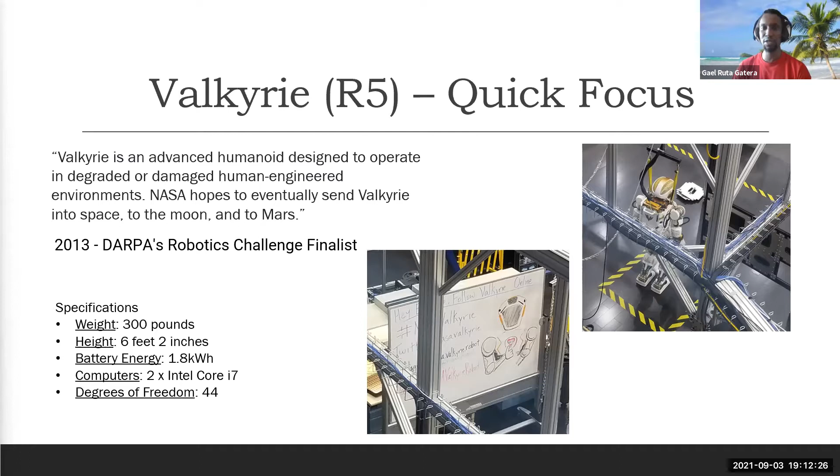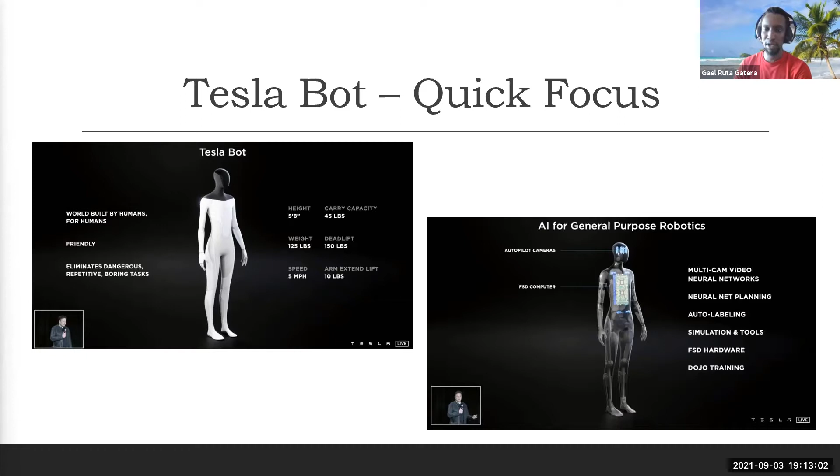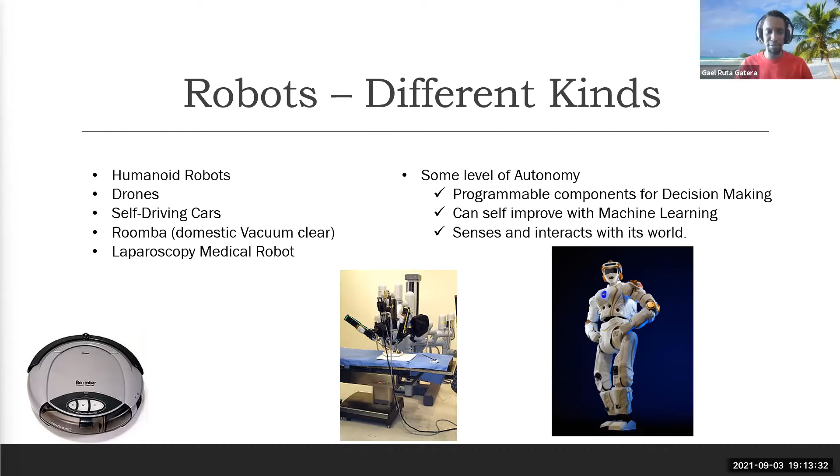One thing I forgot to mention was also this Roomba. It's a small robot that was made to essentially be a vacuum cleaner. It is a robot because it essentially sends a bunch of lasers around it in order to sense and know how far the walls are, and essentially maneuver around your room or even stairs or stuff like that. So it's a robot in that sense.

And so what we'll be focused on for the next few months is aerial robots. You guys have seen drones around - maybe you go to Best Buy, you go to Walmart, you see a bunch of drones. However, some of these drones are robots and some of them are not. Intuitively, the really, really expensive ones are categorized as robots, and the really cheap ones are not robots.

So how can you tell that? The cheaper drones are what we categorize as controlled by RC, or radio control. These kinds of drones, although they may have a camera, they're not able to think, as we mentioned earlier. They don't necessarily have autonomous components, nor can they be programmed with Python.

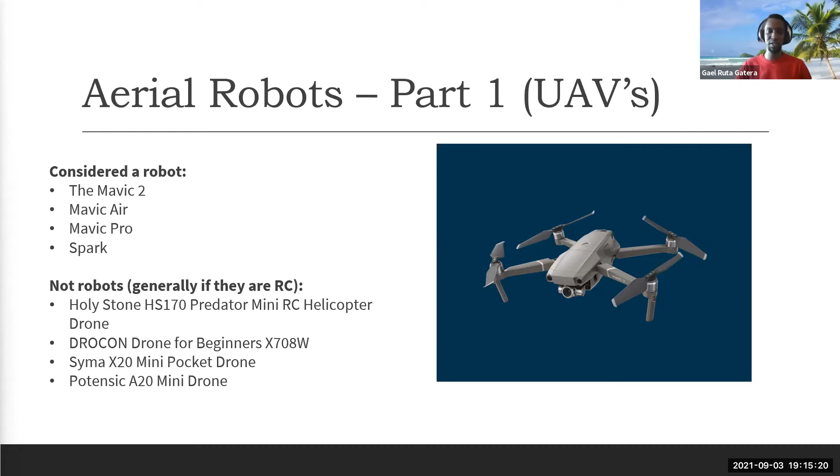However, ones such as the Mavic 2 or Mavic Air are used for inspecting houses and terrains. If the pilot sends the wrong command and the drone is really close to a wall and might crash into it, the drone is able to just stop, because it's able to perceive — the term for it is obstacle avoidance, or object avoidance. So it has those components.

A very famous robot that was sent to another planet is called the Ingenuity, the Mars Ingenuity helicopter. This one was essentially a demo flight to demonstrate that we can fly helicopters on another planet — that we can fly robots on planets other than just Earth.

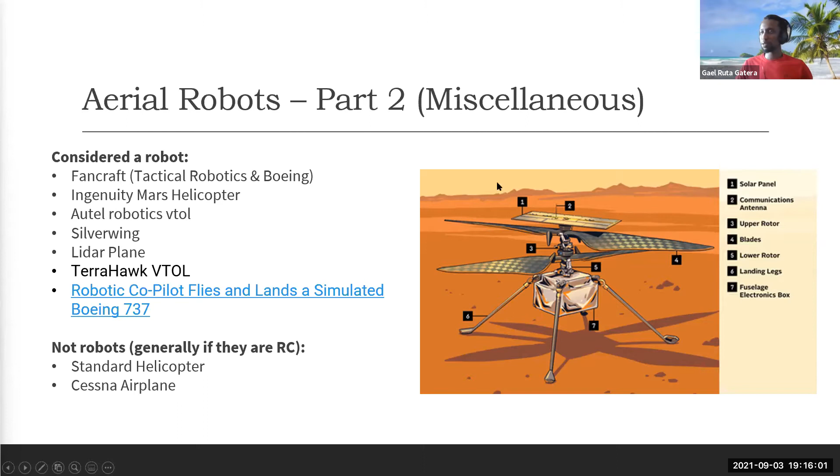There are many examples other than the Ingenuity Mars helicopter. Here's another picture of it. It weighs a mere 4 pounds, so it's really light but extremely powerful. I don't even think most computers weigh under 4 pounds now — this is quite a feat.

This is something that is programmed using very similar methodologies to what you'll be learning here.

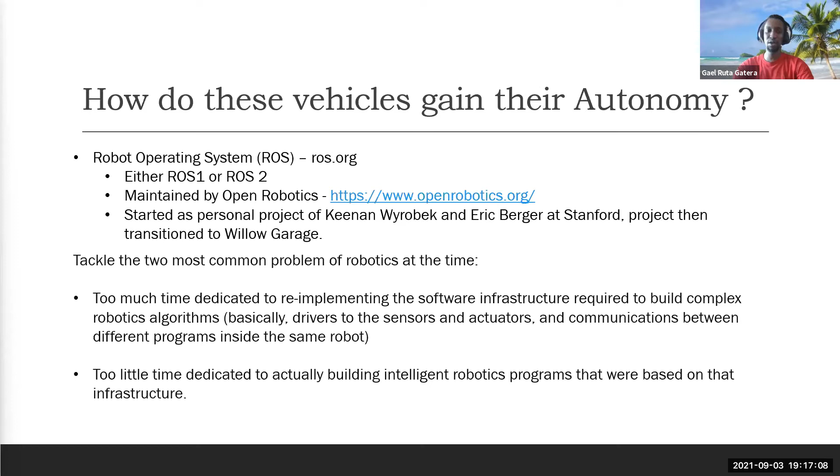Typically, these aerial vehicles and robots gain their autonomy through ROS. We will most likely not be touching ROS, which stands for Robot Operating System, but I wanted to mention it so you're all aware of it. Most of these aerial vehicles, or even humanoid bots, gain their autonomy through this meta operating system called the Robot Operating System.

I wanted to highlight one particular aerial robot that I like, called the Zipline Drone, or Zips for short. These drones are used to deliver medical supplies, and they're actually operational in Rwanda and in Ghana. This shows how important robotics and aerial robots will be to the future of the world. Why do they operate in Rwanda and Ghana? Because of regulatory problems with the FAA — it's easier to start such a project in countries where regulations aren't as strict.

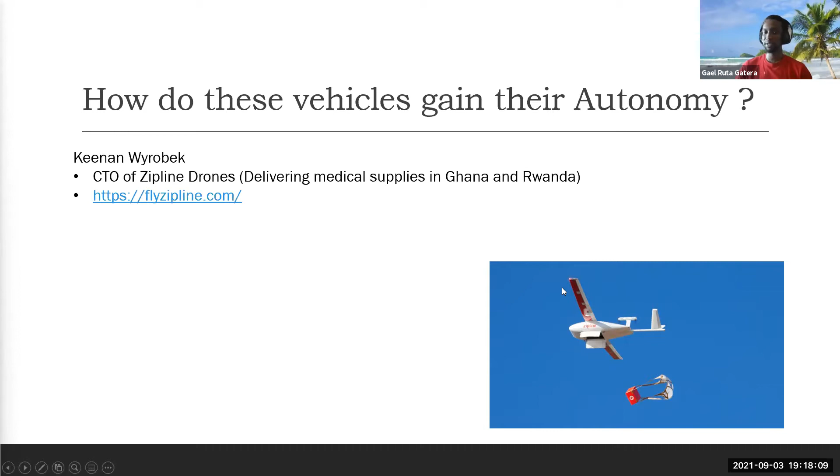I'm going to show you guys a quick Python exercise that involves these Zipline drones. Typically I'm not going to go through this in depth, but let me go through it real quick so you're aware, because we might touch on these subjects when we get closer to ARC.

Aerial robots have several tasks: modeling, state estimation and perception, flight controls, and motion planning. The modeling part is really just the flight dynamics — a bunch of equations or rules that tell the robot what it's meant to do. State estimation and perception is essentially how robots learn to interact with the world around them. Flight controls, in short, are just flight control laws. And motion planning is basically telling the drone what path it's going to take.

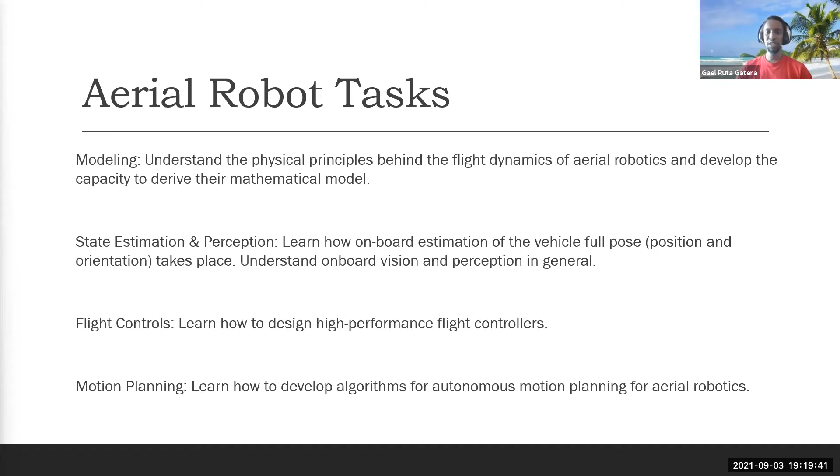Some of these tasks can also apply to other robots, but especially with state estimation and modeling, some of the laws are different. Self-driving cars can also be categorized as robots, because again, they don't use that much human interaction. This is kind of a diagram of what I just showed you guys.

So the last quick slide: the reason why we're all here is that in January, we're all as a team going to enter into what is called the Aerial Robotics Competition by AIAA.

The ARC is essentially a competition where you can be competing with other high school students to design an aerial robot that is tasked for a specific mission. The mission for this year will be search and rescue, and we will be competing with a Tello drone, which you'll be able to program fully in Python.

So you'll be learning quite a lot of really interesting things. I think it's interesting and really cool and really fun. You already have the drone, I think Dr. Adebowale already has the drone with him, so we'll have quite a lot of fun.

I have a drone of my own here. I have a co-drone, and I also have a DJI Tello drone, just because it's really cool for me to play around with these things. There's a lot of fun in learning such powerful things while having fun.

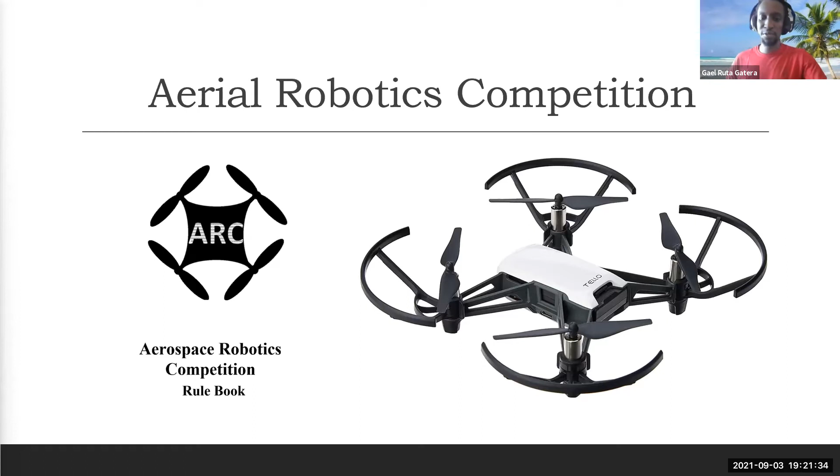So that's kind of what I had for right now. I want to take a pause for any questions before we go into the Python exercise that I had planned.

I have a question. Go ahead. What Python platform will we use? Excuse me? Say that again, what Python platform will we use?

So actually Python, you can use really any platform. I think the word you're looking for is IDE, or Integrated Development Environment. Maybe Jane can answer what she had planned, because I'm flexible with any.

Yeah, so me and the boys have been working with Spyder a little bit, but I don't know if you want to move to Colab or something like that, where we can have a more collaborative environment.

Okay, so I think we can have that conversation separately. But thank you for asking that question, Samuel, that's something we can definitely think about. As far as why we would use Colab, maybe for presentation, but for the actual implementation it will have to be an IDE.

I had PyCharm in mind, that's just because that's what I've used, but anything works for me. There's also PyCharm Edu, which I found recently, which is actually good for educators to send in assignments to students. I've played around with it, I can't remember exactly how it works, but it won't take me long to understand how PyCharm Edu works. I'm also open to Spyder.

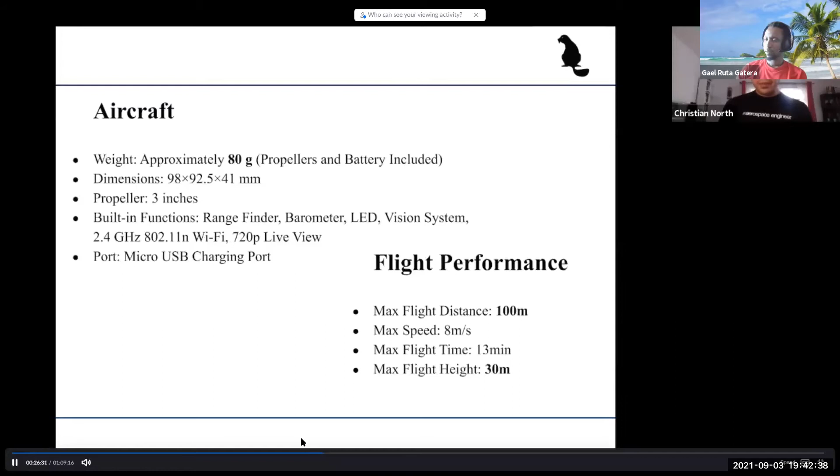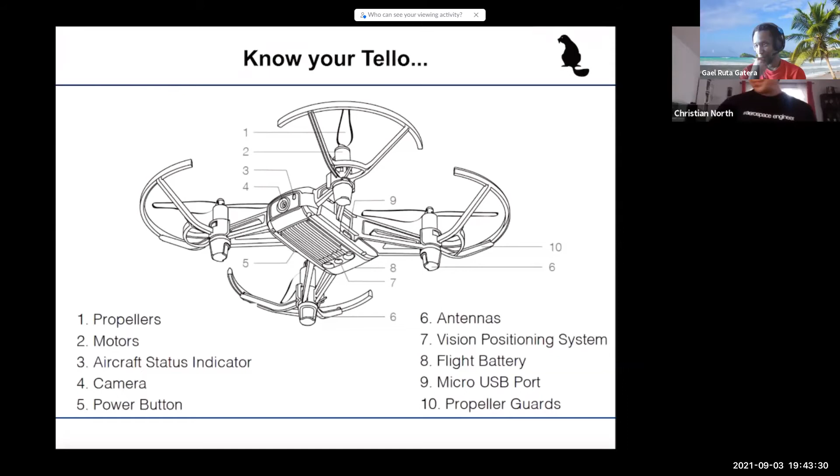So when you grab it like this, that's the way it looks like. Okay. All good? Any questions?

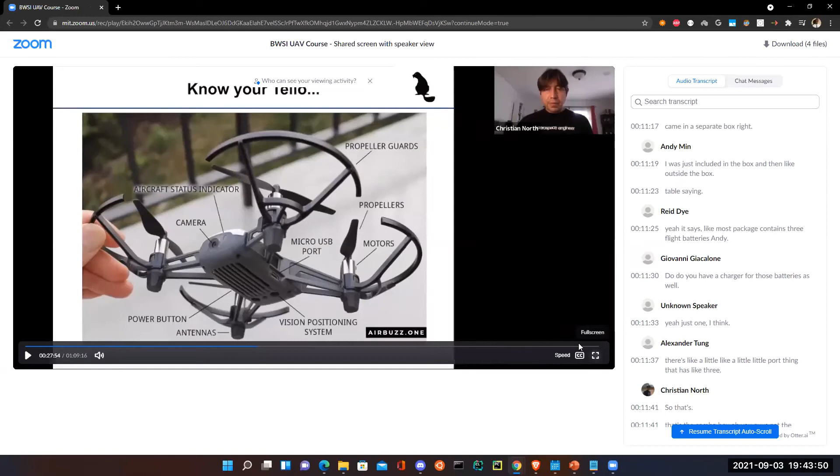I have a question. Go ahead. Why does it have a camera? Why does the Tello drone have a camera, you said? So earlier I mentioned about robotics, right? What makes a robot essentially different than a simple toy? That goes back to that same question. So can you first answer my question? And then - it's based on some of the discussions we had at the very beginning - what makes a robot different than not a robot? What makes a robot, right?

So I'm gonna answer that. It's called automation. The drone has certain autonomous features, and the end goal of a robot is to get it to try, at least to try, to almost make decisions on their own.

For example, you as a human being, why do you have eyes? It's in order to see. So if you're walking somewhere and you see an obstacle, you don't realize it because it's subconscious. Or you see a door, you say, okay, there's a door in front of me, I have to open it.

So why does the drone have a camera? In scientific terms, they call it being able to perceive the space around it. The camera is essentially a sensor in order to give information to the drone, telling it where it is essentially located. That's why, in short, it has a camera.

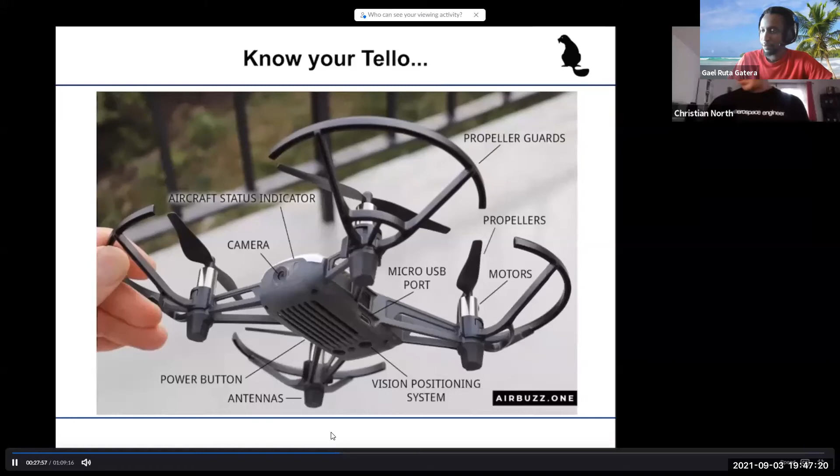Checklists are important, go through your checklist. The propellers are made of plastic, so they can break if it crashes. So if you can get safety goggles, I would get them, just because we don't want you guys to lose an eye or both of your eyes at such a young age if one of the propellers ends up flying off.

However, if you don't have goggles, make sure there's an adult with you that can ensure the propellers are fastened. As we get near to the competition and use our drone more, there might be wear and tear to our brushless motors, which might end up causing issues. So as we get closer to the competition, we might have to put in a budget to get you guys goggles, if not face shields too. A propeller can just fly into your face, which is not fun. You can get cut in your hands and everything.

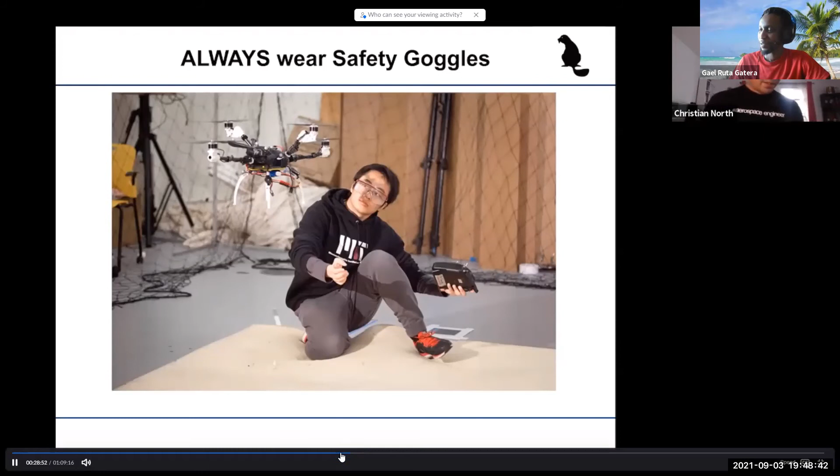Are the safety goggles glass or plastic? They're plastic.

Okay, I'm gonna fly through this really quickly. So remember, make sure that your remote control device, whether it be your computer or your phone, is fully charged. Make sure that the battery on the drone is mounted firmly.

Ensure that the propellers and propeller guards are in good condition. Also ensure that there's nothing obstructing the motors and that the motors are functioning normally. Check that the camera lens and the vision positioning system sensor are clean. Complete the additional pre-flight checklist, I'm gonna give this checklist to everyone.

We're going to go through what an IMU is in another presentation, but essentially an IMU is the inertial measurement unit. In short, that's what the drone uses to know if it's yawing, pitching, or rolling, which we'll go through in another presentation.

I'm going to make sure to give you guys this checklist next time. One thing is, avoid flying around too many people, because if you lose connection to your ground control system, you might end up hurting someone while the drone is flying. The first time we actually take off, you'll see how powerful the drone is. Even though it's small, it's small and mighty.

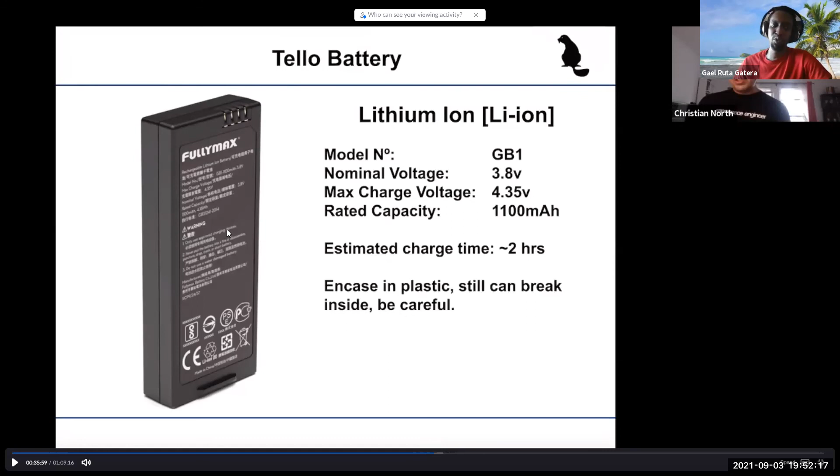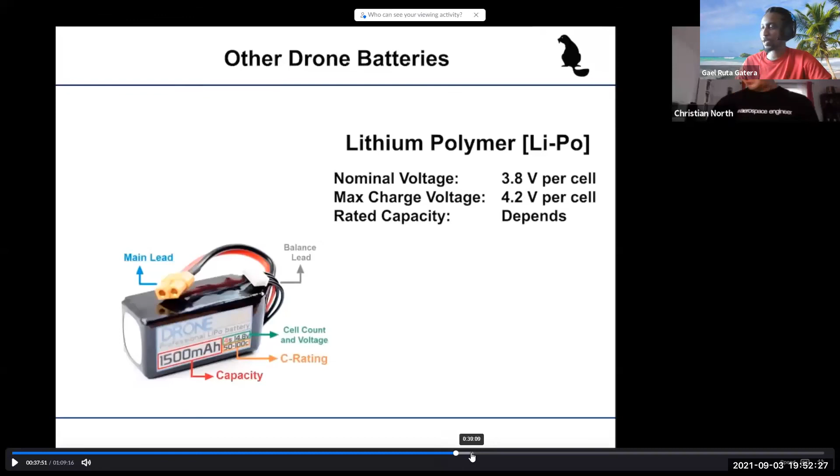Also, keep your battery in a very safe space, because these can blow up. I'm going to show you guys what a lithium-ion battery can do. And don't poke at it either.

That's all I had for you guys today. I'm going to make sure to send you guys the checklist for sure, and maybe also get my own safety requirements document for you guys to follow. But that's all I had.